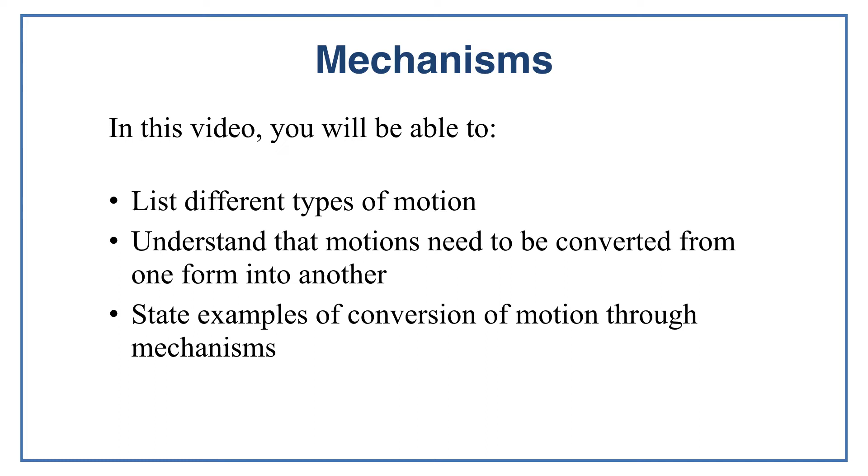Today we will talk about mechanisms. In this video, you will be able to list different types of motion, understand that motions need to be converted from one form into another, and state examples of conversion of motion through mechanisms.

What can mechanisms do? They can change the type of movement, transmit movement and force, change the speed of movement, amplify or reduce the distance of movement, change the direction of movement, and change the amount of force a movement provides.

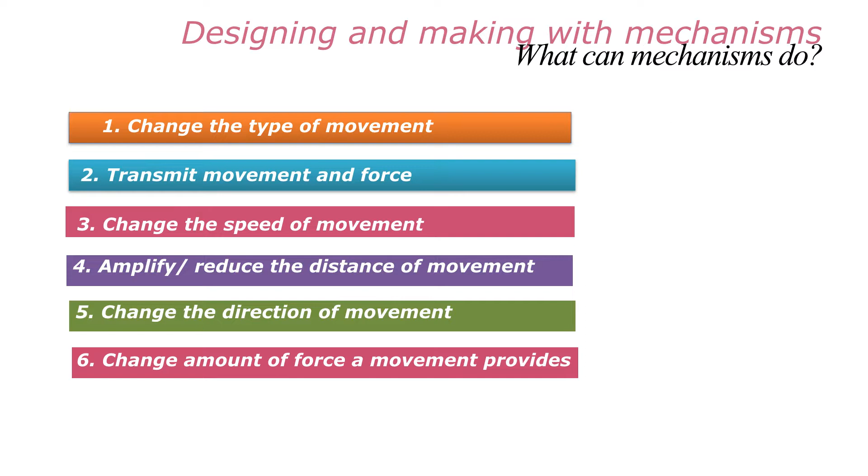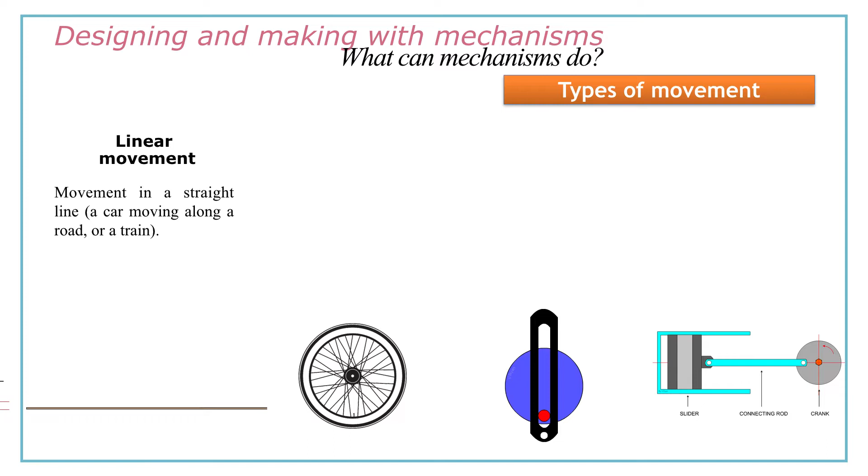What are the types of movements we have? The first one is linear movement. It is movement in a straight line, for example, a car moving along a road or a train. As such, linear movement can be represented by an arrow. The next is rotary movement, which is movement in a complete circle, for example, a wheel turning. It can be represented like this.

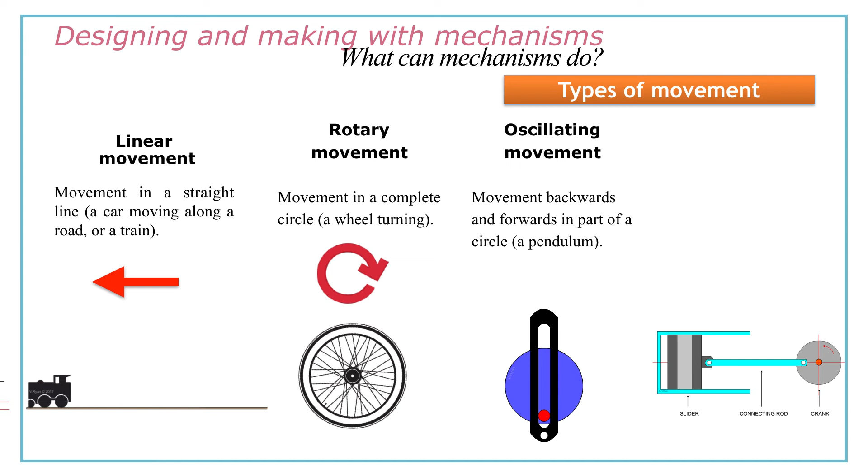The next is oscillating movement, which is movement backwards and forwards in a part of a circle, for example a pendulum or the mechanism given here. It can be represented as such. The next is reciprocating movement, which is movement backwards and forwards in a line. For example, the piston and cylinder arrangement given over here, which can be represented like this.

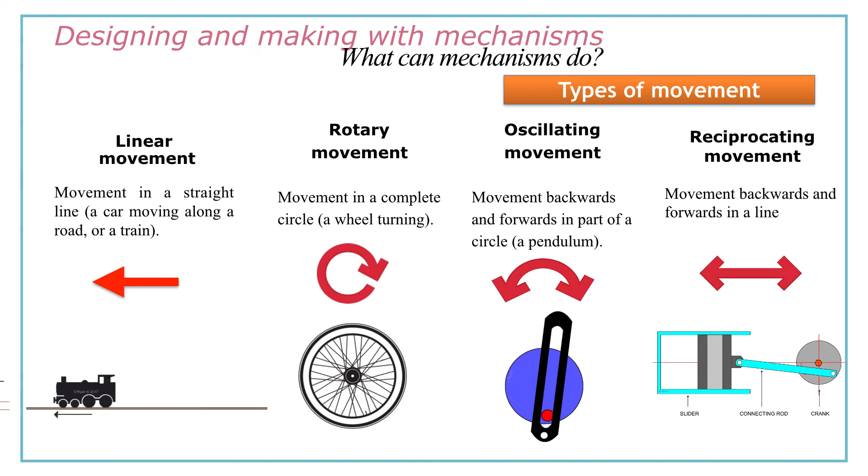Now, how do we change the type of movement? One method of doing that is using wheels. The wheels on a wheelchair rotate, but the wheelchair moves forward in a straight line. Rotary movement has been converted into linear movement. The transformation of the movement can be represented like this.

We can change the type of movement using gears as well. Gears come in many different shapes and sizes. A gear is a wheel with teeth. It can be fixed to a shaft so that it turns at the same speed as the shaft. Here you see a gear A which drives a gear B. Gear A is the driver gear and gear B is the driven gear.

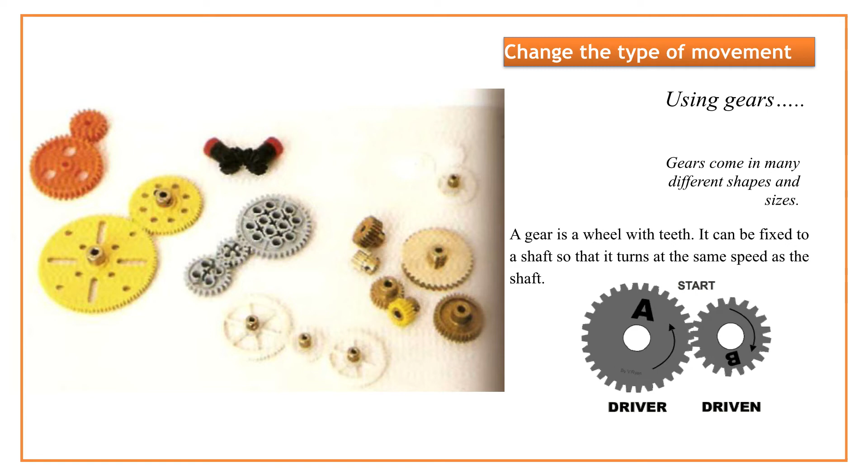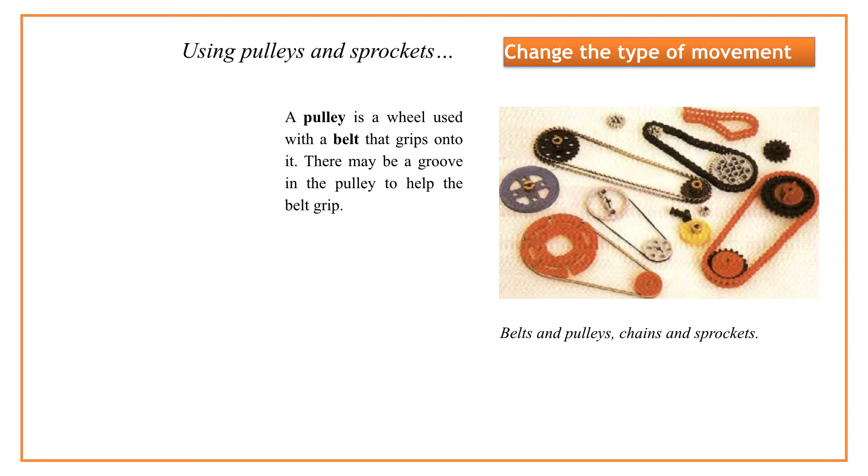Using pulleys and sprockets can also change the type of movement. A pulley is a wheel used with a belt that grips onto it. There may be a groove in the pulley to help the belt grip. A sprocket is a gear wheel used with a chain wrapped around it. The teeth on the sprocket fit into the gaps of the chain.

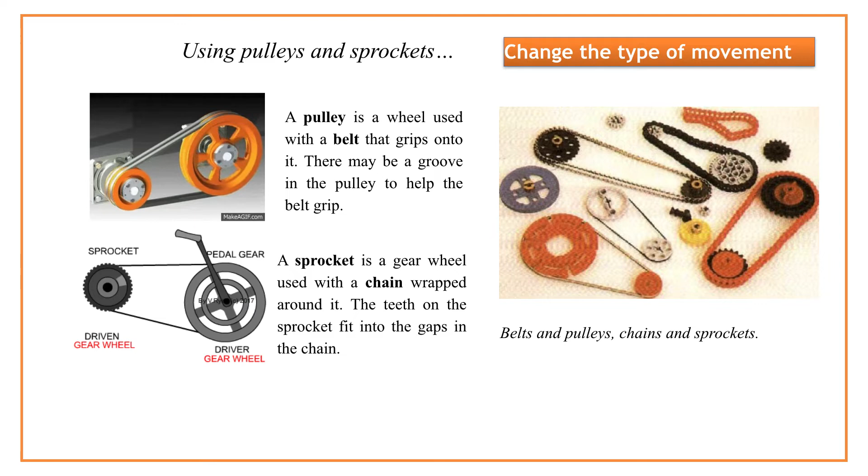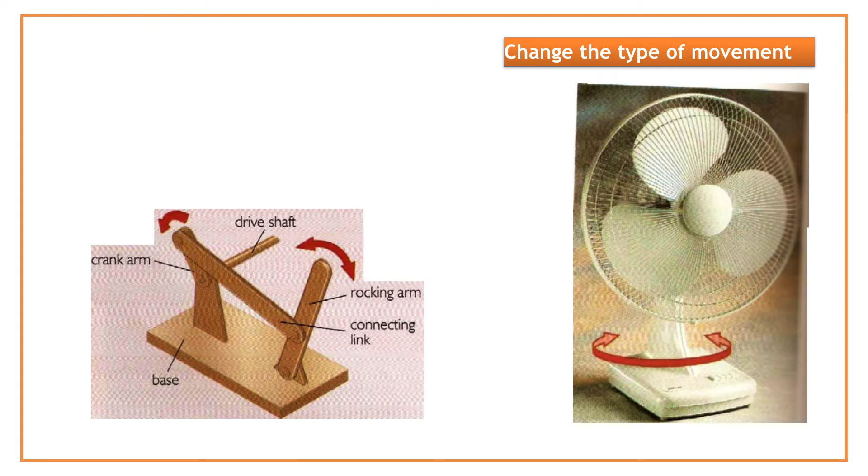In this fan, a crank arm rotates and changes rotary motion to an oscillating movement. This is an illustration of the mechanism used. It is also known as a 4-bar linkage. The small crank arm rotates. It is connected by a link to a lever which oscillates or rocks to and fro. This is often called a rocking arm. The fourth link is the base, which does not move.

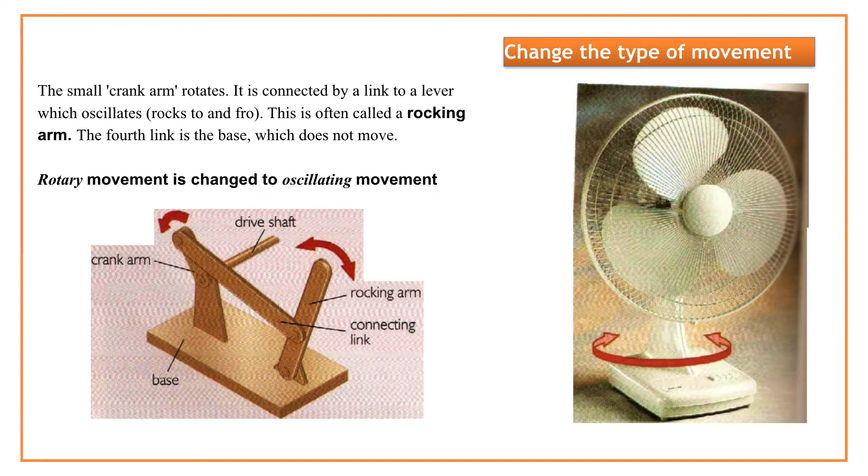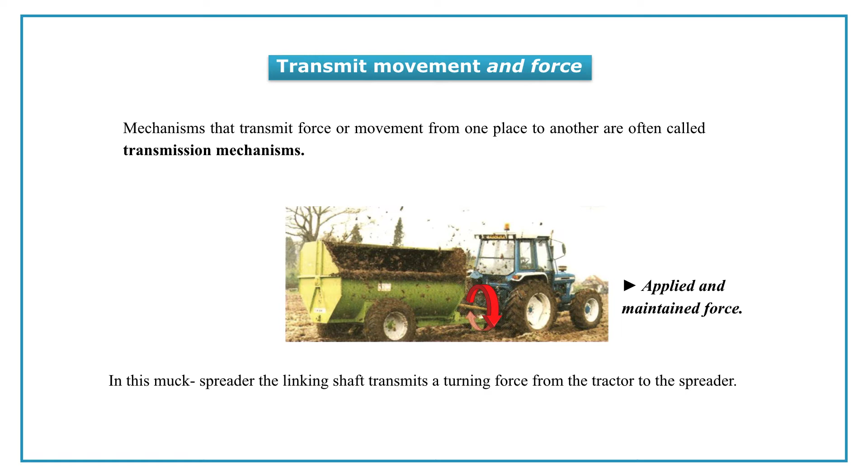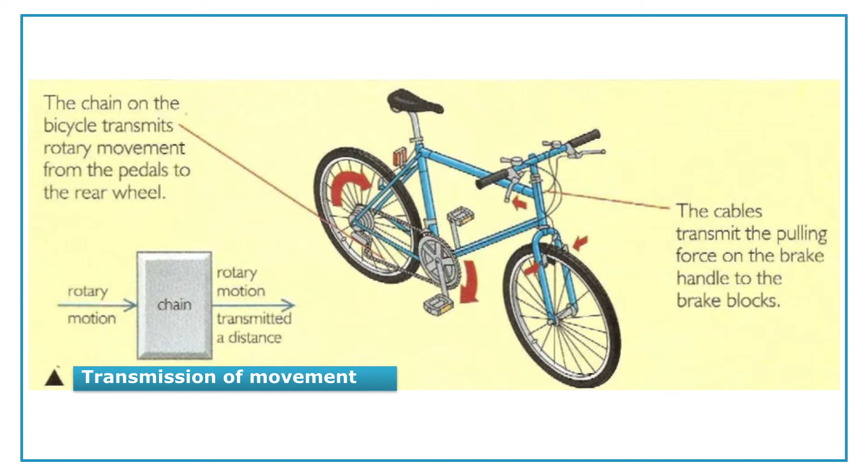Mechanisms that transmit force or movement from one place to another are often called transmission mechanisms. In this muck spreader, the linking shaft transmits a turning force from the tractor to the spreader. The bicycle gives very good illustrations of transmission of movement. The chain on the bicycle transmits rotary movement from the pedals to the rear wheel. The cables transmit the pulling force on the brake handle to the brake blocks.

Cranks make drilling and pedaling easier. Cranks are stiff arms fixed to a shaft so that when the shaft rotates, the arms rotate too. They are often attached to handles and are used to make turning and tightening easier. Levers are bars or rods that move about a pivot or fulcrum. Sometimes they are made in pairs to grip or crush something.

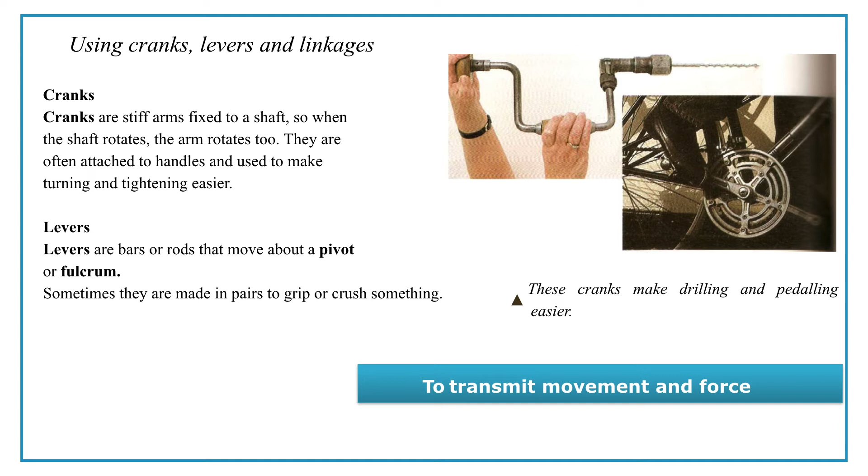Linkages are used to join different parts together so that they can move in a particular way. They are often connected with pin joints. You can use parallel linkages to make two or more parts move together and/or stay parallel as the linkage moves. Parallel linkages keep the trays level when you open this toolbox. Pin joints allow free movement of the linkages.

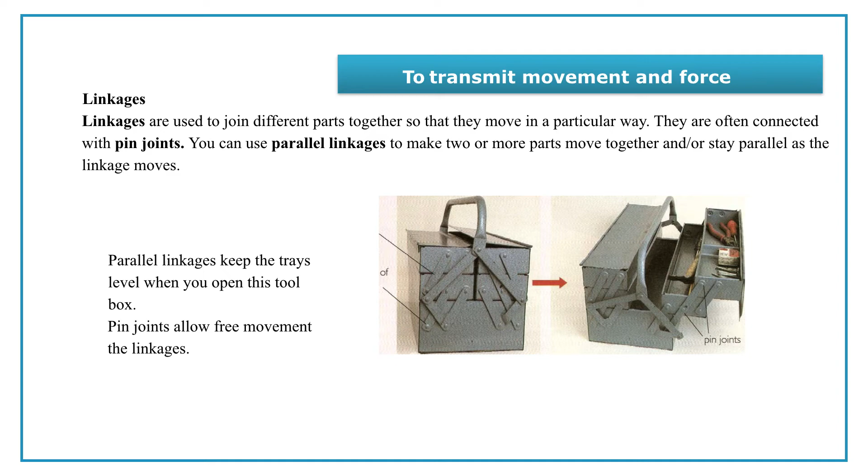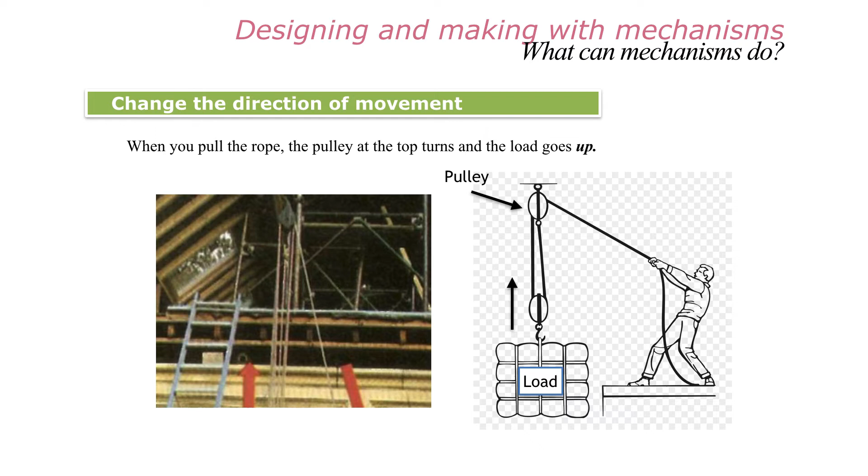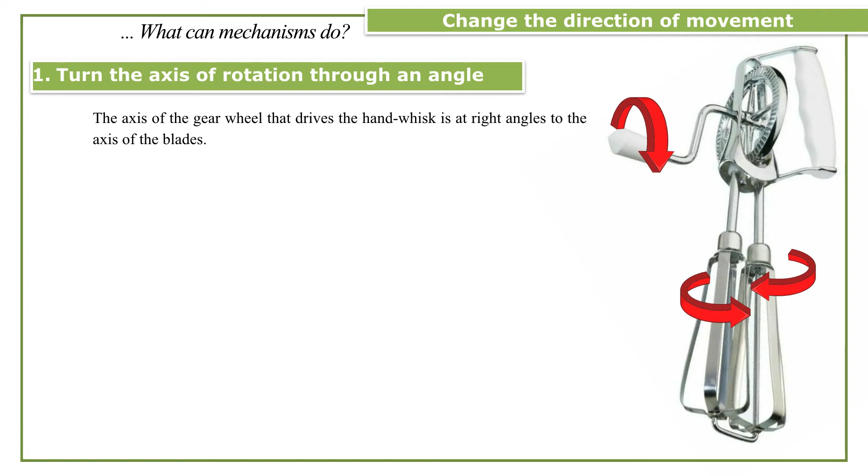Mechanisms can also change the direction of movement by turning the axis of rotation through an angle. We have the example of a hand whisk over here. The axis of the gear wheel that drives the hand whisk is at right angles to the blades. This arrangement turns the movement through 90 degrees and is therefore a change in the axis movement.

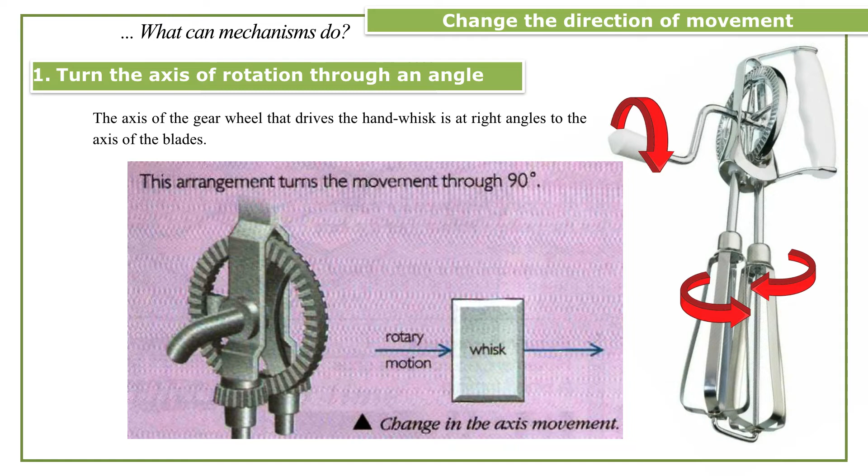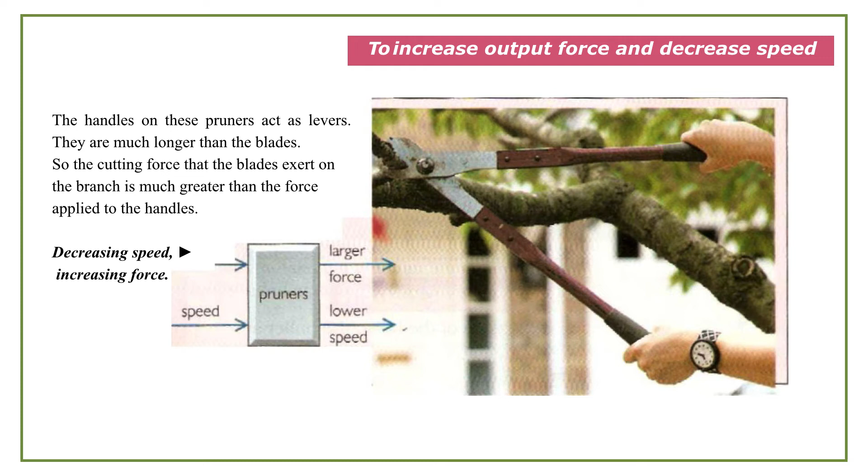In these pruners, output force increases and speed decreases. The handles on these pruners act as levers. They are much longer than the blades. So, the cutting force that the blades exert on the branch is much greater than the force applied to the handles.

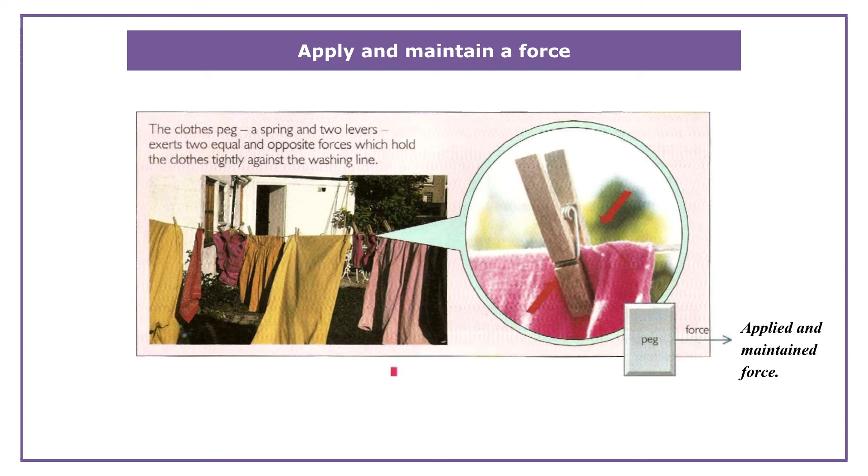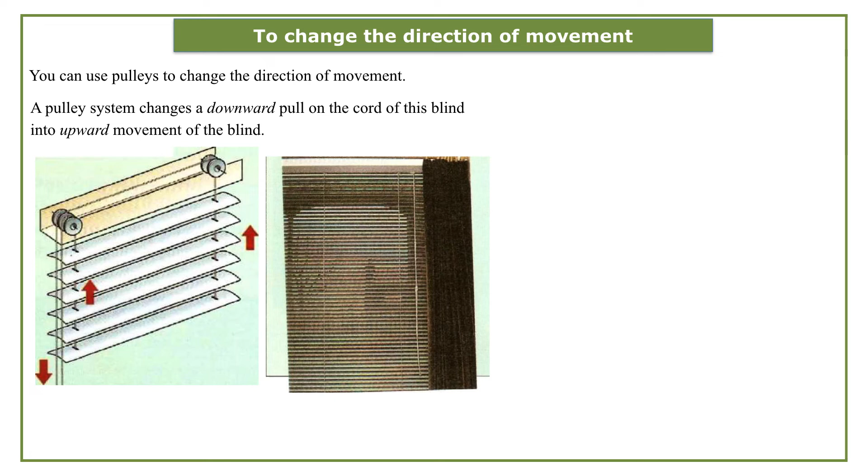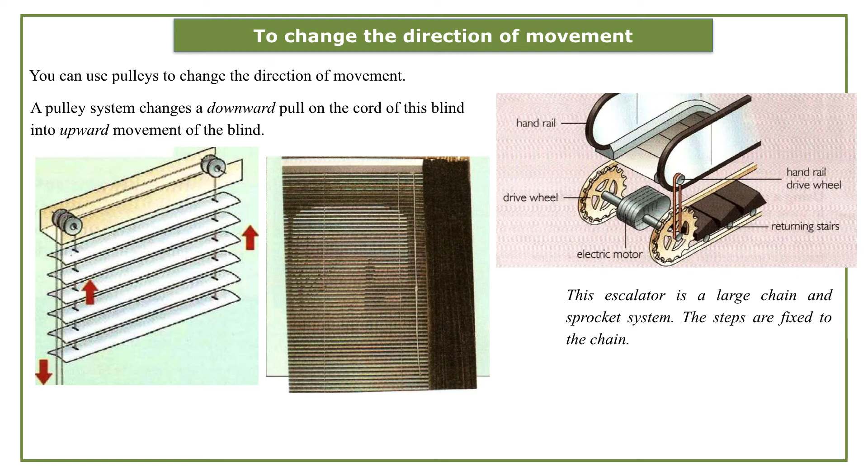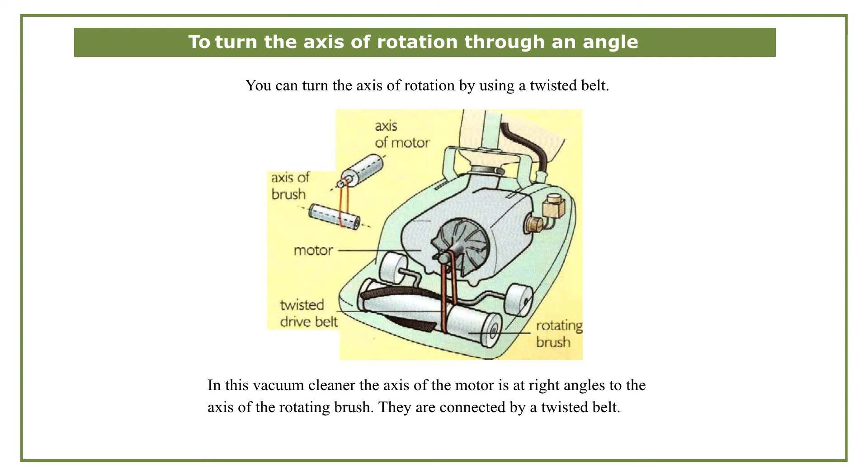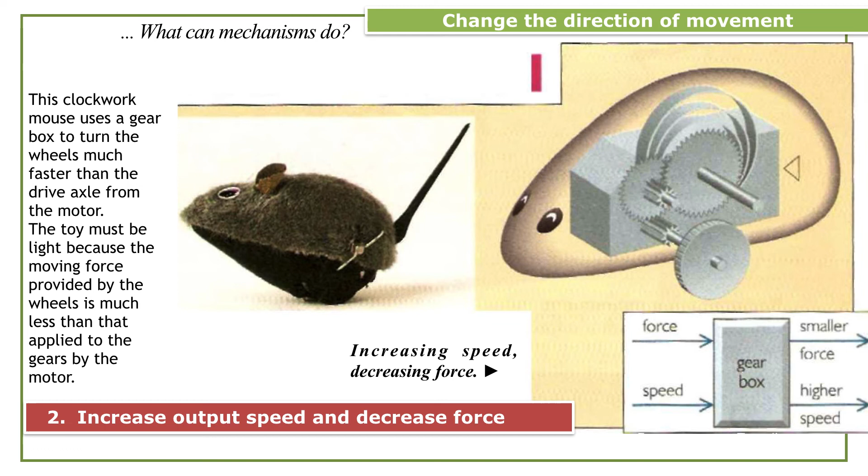Gear trains can also be used to decrease output force and increase speed. In this arrangement, there are 3 times as many teeth on the input gear as the output gear. When the input shaft turns once, the output shaft will turn 3 times.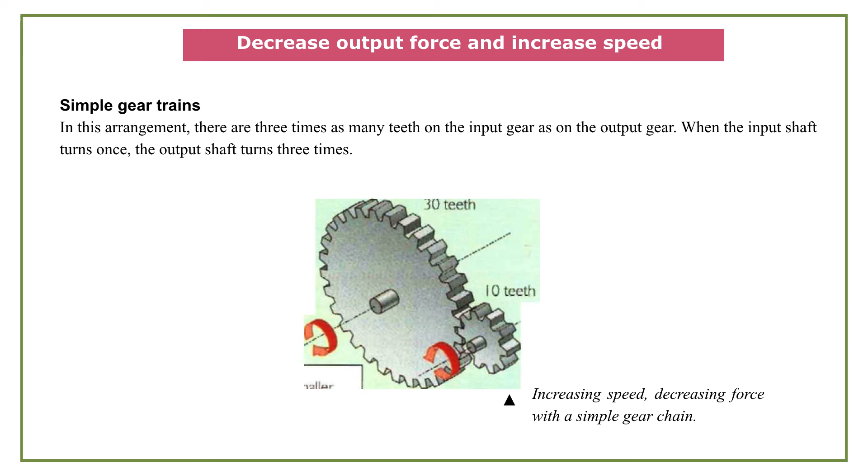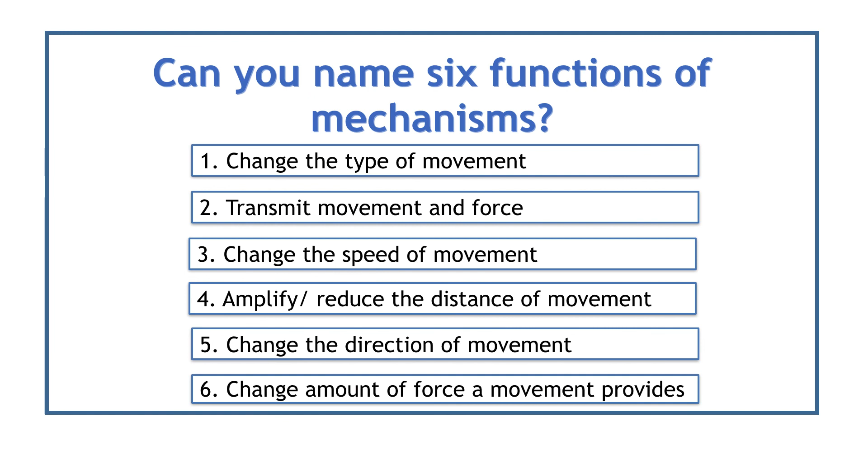As a small exercise now, can you name 6 functions of mechanisms? They can change the type of movement. They can transmit movement and force. Change the speed of movement. Amplify or reduce the distance of movement. Change the direction of movement. And change the amount of force a movement provides.

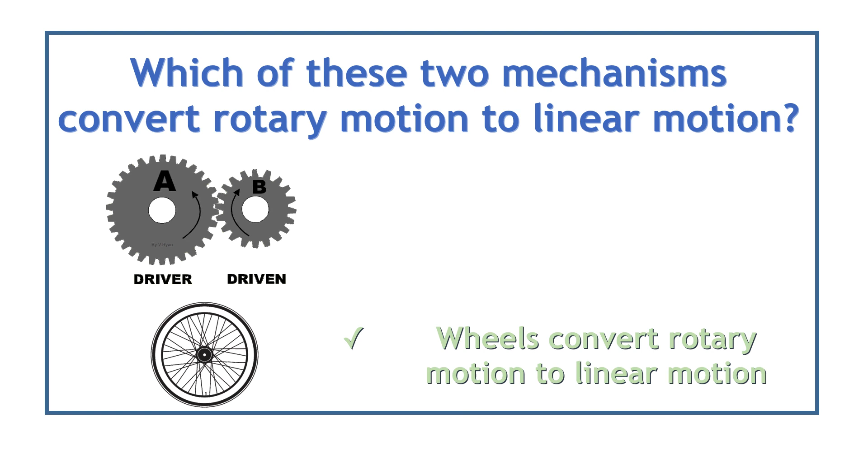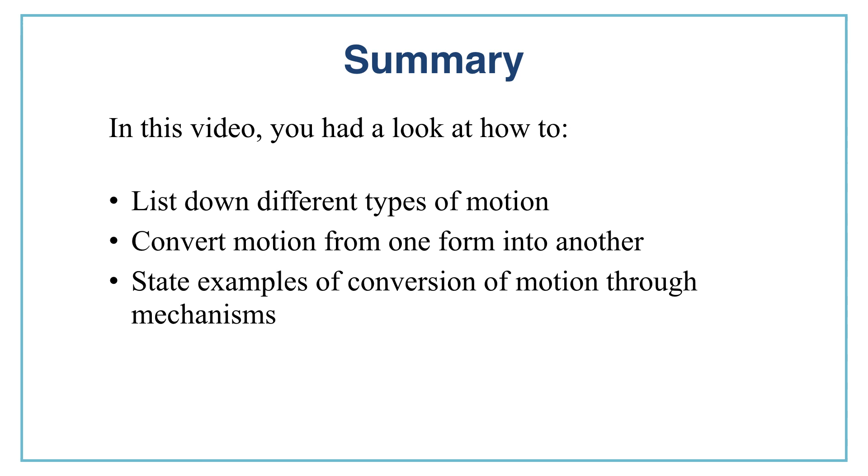Now, which of these 2 mechanisms convert rotary motion to linear motion? Correct. Wheels convert rotary motion to linear motion. In this video, you had a look at how to list down different types of motion, convert motion from one form into another, and state examples of conversion of motion through mechanisms.